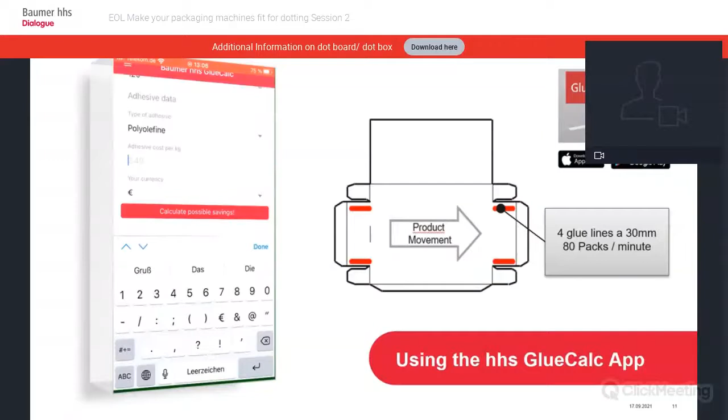When you press the Calculate Saving button, you will see your production potentials in the graphic. With a 5 mm dotting, you get more than 20,000 euros saving each year, and on top, an annual carbon footprint reduction of about 80,000 kilograms.

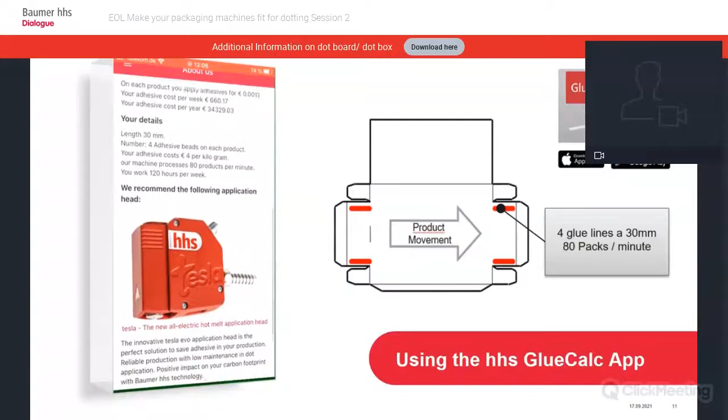The result and the recommended product you can send to your mail address or share it with other people.

And like quite often in life, sometimes less is more. And this is also the truth in gluing. Instead of squeezing glue out of the box, a dot pattern can fix the cardboard with a similar or even higher bonding strength.

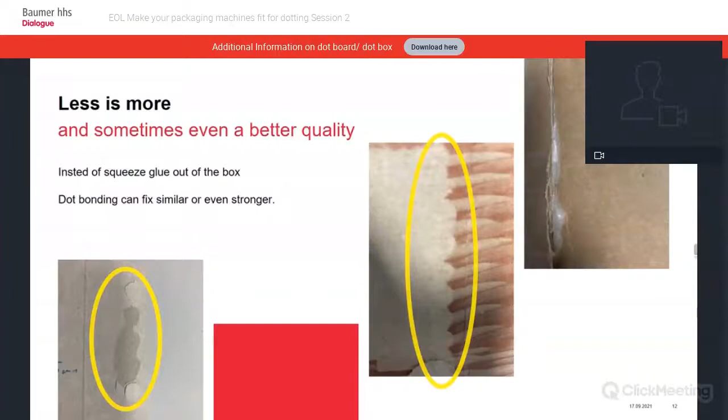Okay, our calculation is done now, but this is only theory. Let's have in the next step a look in our solution center. There we can see some of the products that we need to fulfill these calculated savings.

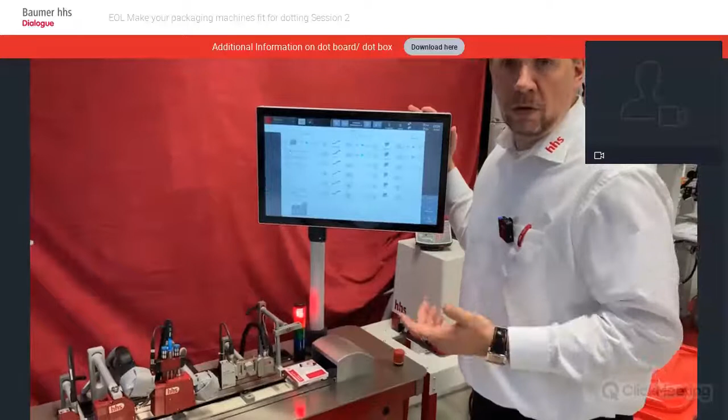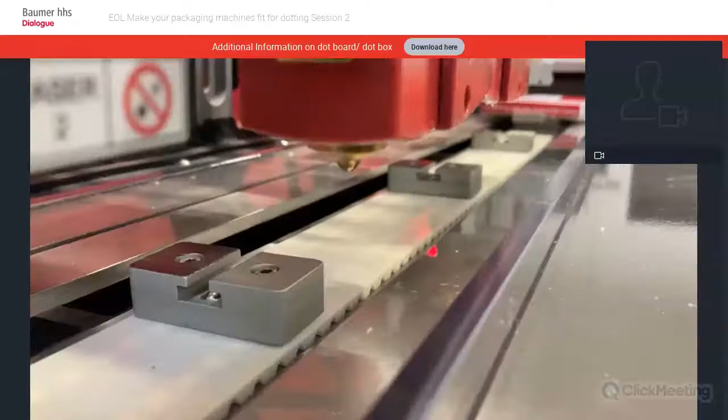We are proud that we have developed our Dotbox Kit, which makes a change from line to dot very easy. It just consists of our dot box and the Tesla applicator. On our simulator we have an HMI that is driving our melter to set up the temperatures on gun and hoses, and also controls classical applicators like pneumatic or our Tesla Evo gun, which can connect to a classic PLC. The PLC is driving a classical line application.

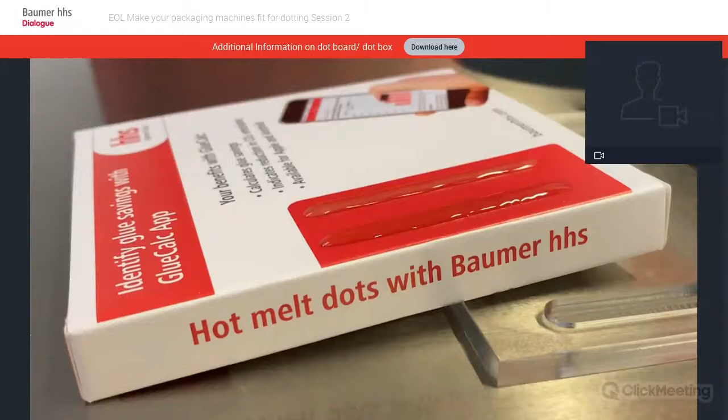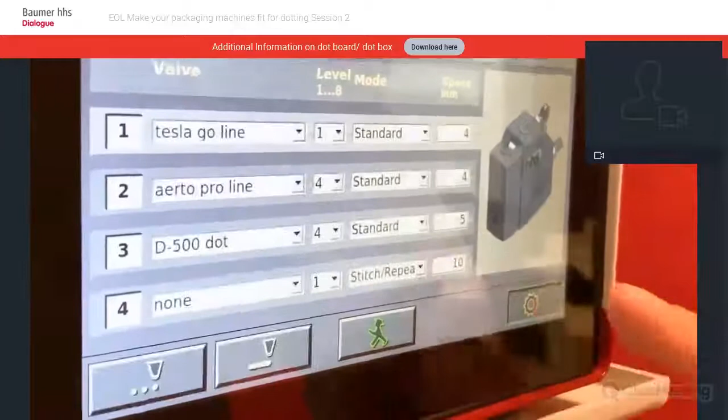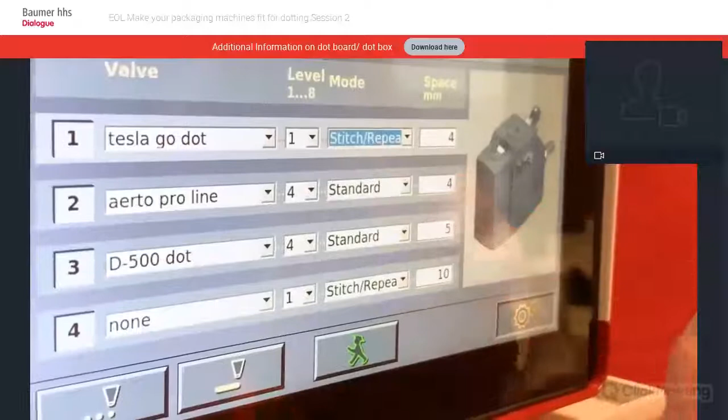To switch to a dot mode or to dotting, it's quite easy with our dot box. We just press this setup button, adjust the Tesla Go into a dot mode, choose the stitch and repeat mode, and set up the dot distance we want to reach in our application. The same, of course, we can do for pneumatic applicators.

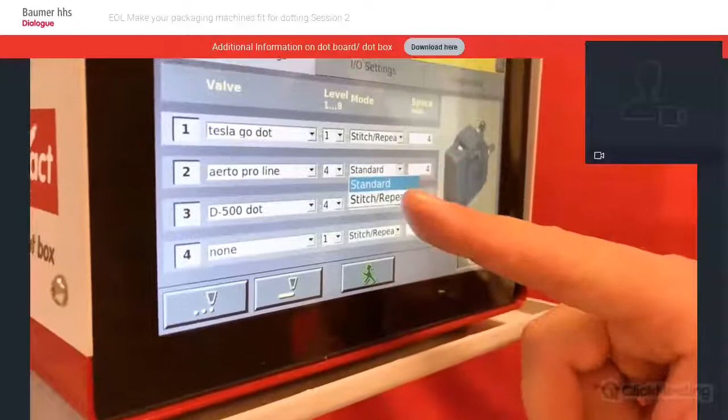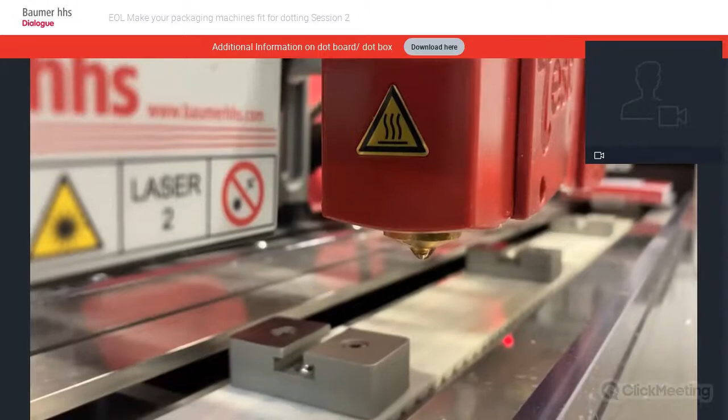Now our dot box between the HMI and the applicator is changing from line to dots. So in our diagnostic tool, we show directly how much glue you are saving depending on the dot distance and the dot size.

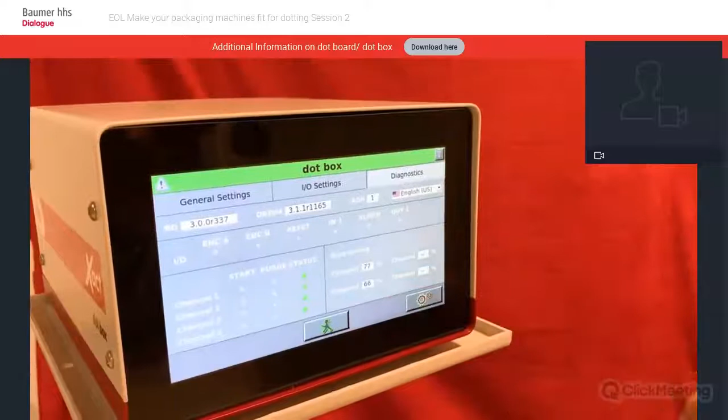As you have seen, with the Dotbox it's possible to change the line into a dot mode with electronic or pneumatic applicators. We adapt the Tesla in the Dotbox Kit, so that is something which really makes sense to run your production with an electronic gun and with our Dotbox.

For us, the Dotbox kit is something like a starting kit that gives you the chance to check your calculation in practice. The kit includes 2 Tesla valves that can be connected to Nordson or Nordson compatible gluing systems.

There is 1 dot box that can drive a maximum of 4 glue valves and generate your dotting pattern. You also find in the kit different screw-on nozzles with different diameters and 2 standard packaging brackets. In case the standard mounted 180 hose connection doesn't fit, there are also 90-degree and 45-degree hose connections included.

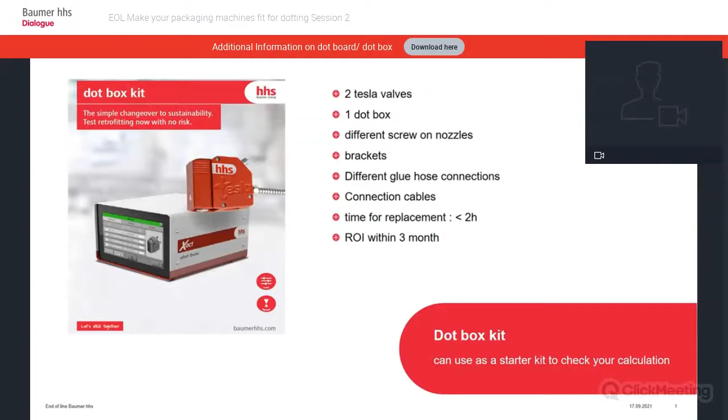Of course, you find also the right connection cables to solve a replacement in less than about 2 hours. Because of the low price for the starting kit, we expect that you can reach the return on investment in less than 3 months.

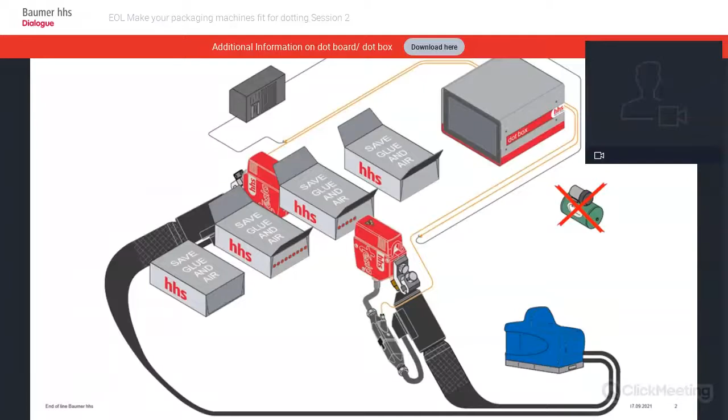Your current situation is maybe like this. After installing the kit, it should look like this. And that has the wonderful green effect that you don't need the compressed air anymore.

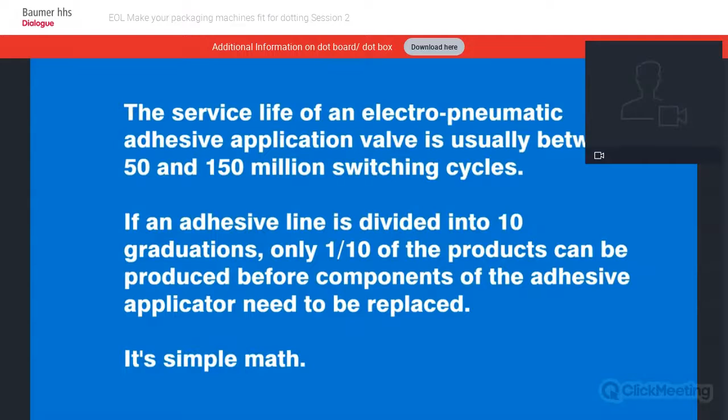It's simple math. Depending on what type of adhesive dispensing applicators you are using, your savings made through stitching and dotting may be at the expense of higher spare parts costs and downtime associated with changing them. Why don't businesses realize they are paying more and saving less than what they could? The answer is, many companies have become accustomed to this situation and are not aware of the high cost of the spare parts used in their hot melt applications.

Electromagnetically driven adhesive applicators, such as the Baumer HHS Tesla, have a 10 to 20 times longer service life. Why do many adhesive dispensing suppliers want you to stitch or dot with your current electro-pneumatic applicators?

There are 2 obvious answers. The first answer is simple: offering you electromagnetic applicators instead of their standard electro-pneumatic would destroy their business model. One of the leading suppliers of hot melt systems publishes that it generates 54% of sales from spare parts and services. Why would the supplier jeopardize that?

The second answer is, all suppliers have electromagnetic applicators in their stable of products. However, these have often been neglected in research and development, and are no longer state-of-the-art. Most suppliers only use their electromagnetic guns when pressured, and often they only work in very limited situations.

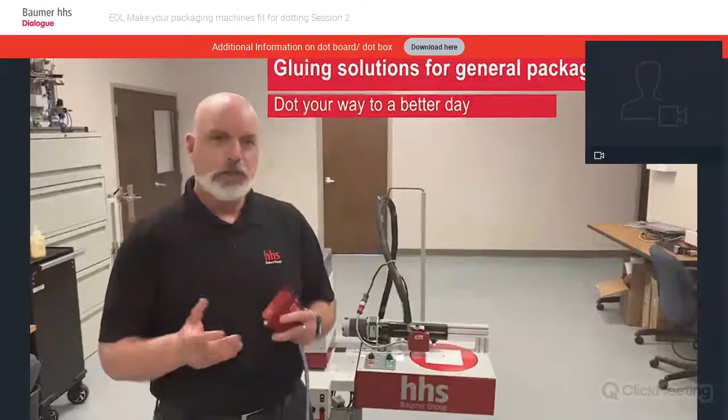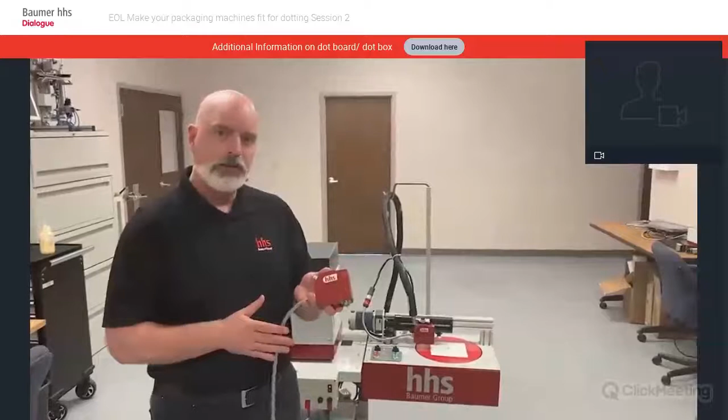Hi, I'm Rick Pallanti, and welcome to our virtual trade show for PMMI. Sorry we don't see you live in Chicago, but here you are on tape here in Dayton, Ohio. This is our lab, and we're going to talk to you today about how to dot your way to a greener day using our Tesla all-electric 24-volt actuated gun.

The Tesla is kind of revolutionary to the packaging industry. If you want to think about it, most of your guns you're used to are pneumatic, and a pneumatic gun requires air, and therefore it has seals. You'll see that guns a lot of times will have adhesive leaking out of their weep holes due to seal failures.

Most pneumatic guns will have maybe 5 million to 50 million cycles before they need some type of spare part or repair. The Tesla is unique in the aspect that it's all electric, so there are no dynamic seals to fail. So on the Tesla, you're looking at a much longer service life than a pneumatic valve.

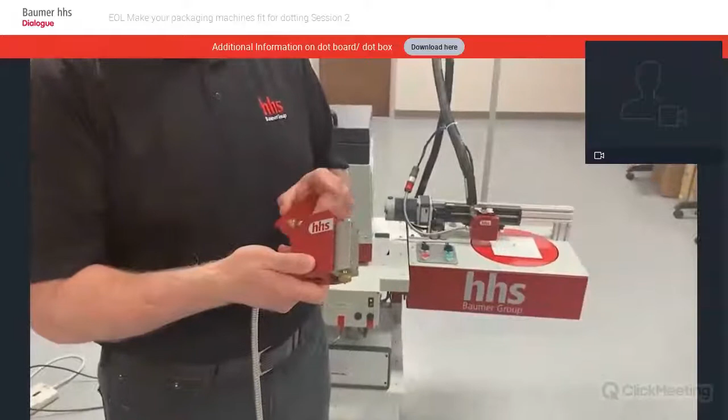And what's nice about it is it runs off the same 24-volt signal that your pneumatic applicator runs off of. So there's really no change for what you have to do in order to go from pneumatic to electric. This also means that you're not using compressed air any longer.

Compressed air is a very expensive resource, and it's something that you have to bring to the machine, you have to bring to the gun, and a pneumatic gun will operate differently depending on what type of pneumatic pressure is coming to it. If the pneumatic pressure drops, then the gun doesn't cycle, or it wants to string, or it wants to drool. You'll never have that problem with a Tesla gun. You'll always operate the same way each and every time.

The Tesla is also very, very robust. I wish you could feel this, but it weighs about twice that of a pneumatic applicator. It's a tank. It will last a very long time. So you're looking at about 1 billion cycles for this gun versus 50 million for a pneumatic applicator.

Now, we talked about how to dot your way to a greener day. So what does that mean?

What we're going to do is, on a packaging application, take what you normally would do as a bead, which would be a solid line of adhesive, and dot it instead. We're going to take that 24-volt signal and run it through a dot box, and we're going to break it into these dots.

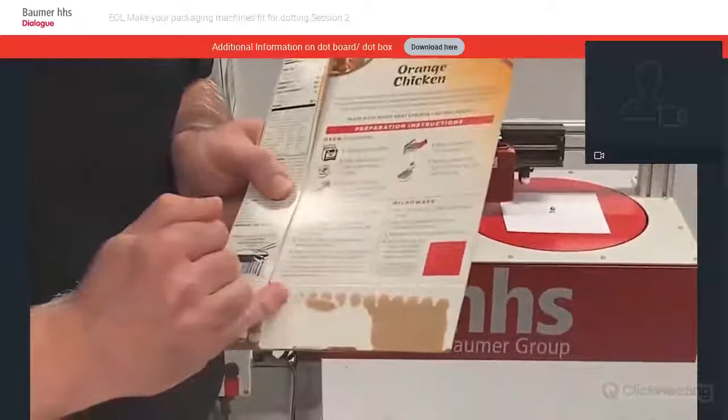When you have a very long bead, there's a lot of residual heat that sits in the product, which can lead to pop opens a lot of times. So it's kind of like you have to think about it as a jelly sandwich. If you've got a carton and both sides are glued together and it pops open with glue on both sides, then you've got a cohesive failure.

A lot of times that's because there's too much adhesive on the carton, and that's why you get the pop open. Going to dotting really eliminates that, because now you have individual applications of glue with the same amount of heat through that. So I'm using 50% glue, and you can still see how I'm getting great fiber tear. If you try to stitch a bead, you're still basically just having larger beads with a small break in between, so you're really not gaining that much for your application. But in this case, with dotting, we're reducing glue by 50% and still getting a good tear pattern.

Now, you may not know about Baumer HHS, but we've been in the business for a long time. We're really known for making the folding carton, and the application we do is for very high speed cold adhesive gluing. Cartons like this will run anywhere between 1,000 and 1,500 feet a minute. That's incredibly fast, much faster than what you normally run in general packaging.

So what this does is it shows that we know how to run an electric gun, we know how to make an electric gun last long, and we know how to dispense the adhesive. We've taken that knowledge and transferred it to hot melt technology. And that's what we've done with Tesla.

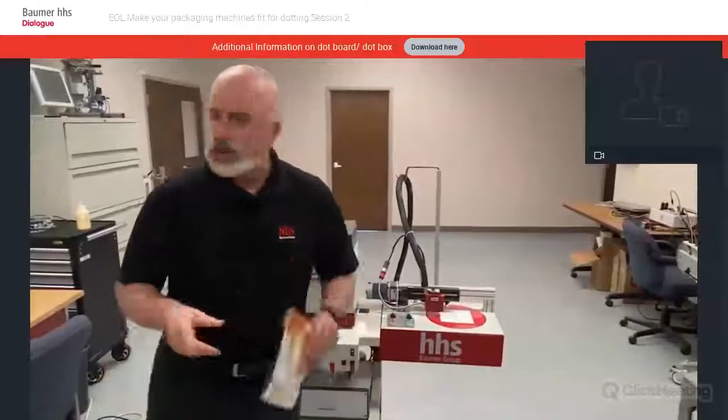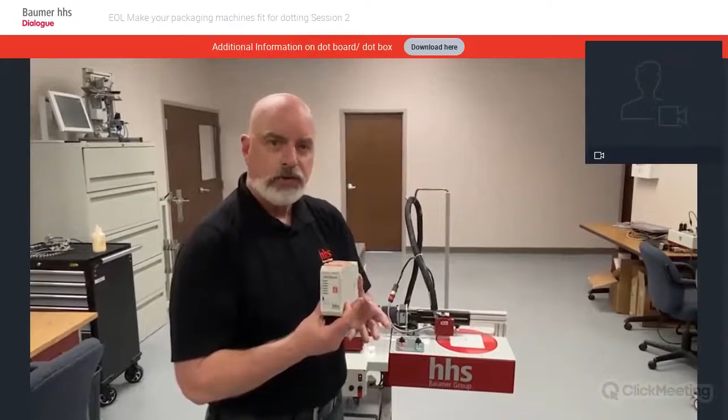In order to get the Tesla to work the way you want it to, we've developed a dot board. What the dot board does is it takes that 24-volt signal, and we're able to program it. This can go either into the OEM box and run from the PLC, or we have a dot box that we can sell that goes in between the applications—you can do it DIN rail mounted inside, or as a separate box in the system itself. By taking this dot board, we're able to take that signal and break it into 50%, 60%, 30%, whatever works for your application.

And we can add the Tesla and the dot box to your existing application. You don't even have to change your hoses or your melter. We can just add the Tesla gun, add the dot board, and you can start dotting.

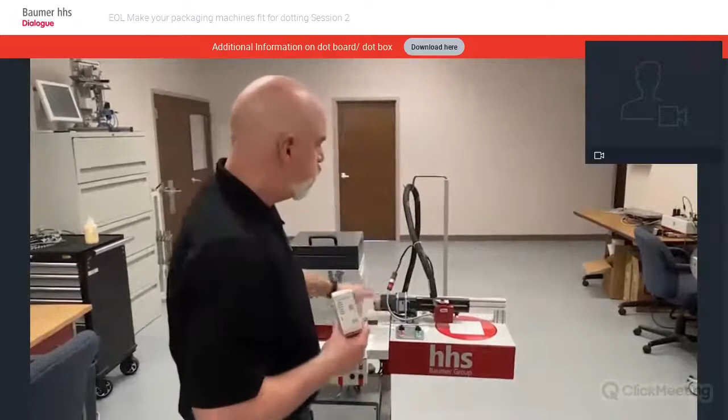Now in this application, we're showing all HHS. So what we have is our X-melt unit, which warms up in about 20 to 25 minutes. That's typically twice as fast as most melters in the market right now. So you're using a lot less heat.

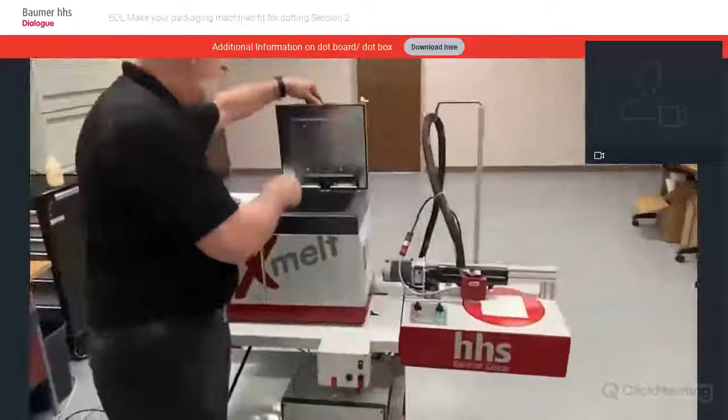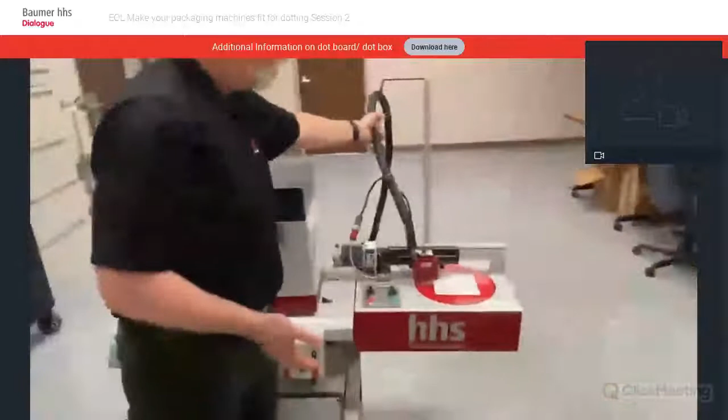And the way this is set up, if you want to come in and take a quick look, we've got it set up so it's got the fins—the top portion is unheated and only the bottom portion is heated. We run that through this hose, and this hose is only 30 millimeters in diameter. Most hoses are 45 millimeters in diameter.

It's like trying to wrestle an anaconda through your OEM machine. So by going to the smaller diameter hoses, you're not losing anything, because the hose core is the same as it would be on the larger 45 millimeter hose—it's an 8 millimeter hose core, which gives you the same flow. So you're able to get the flow and have a smaller overall profile, which is very beneficial for maintenance, or if you're trying to run longer hoses through the machines.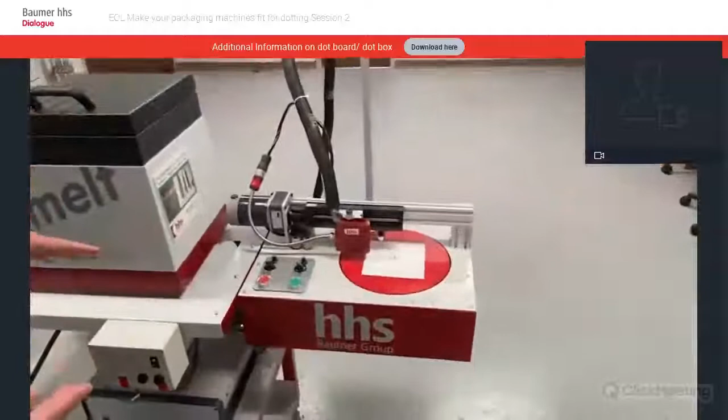And then it comes to our Tesla gun. This whole system right now is set at 350 degrees. The Tesla with the cover on it—what this cover does is it protects you for incidental contact, when you're trying to change a nozzle or take this off, it's going to protect you from coming in contact with it. And that's a really beneficial safety aspect for the machine.

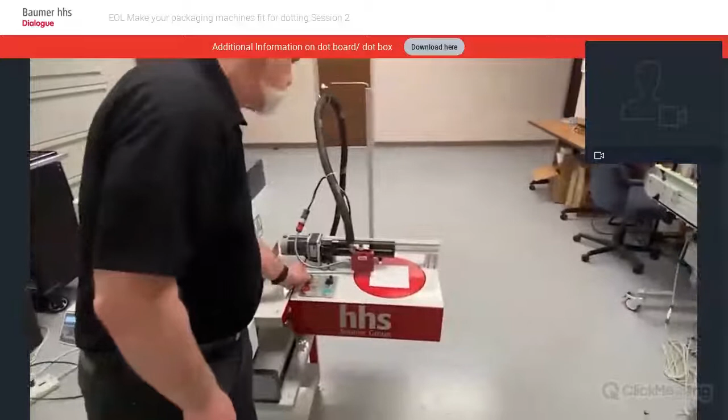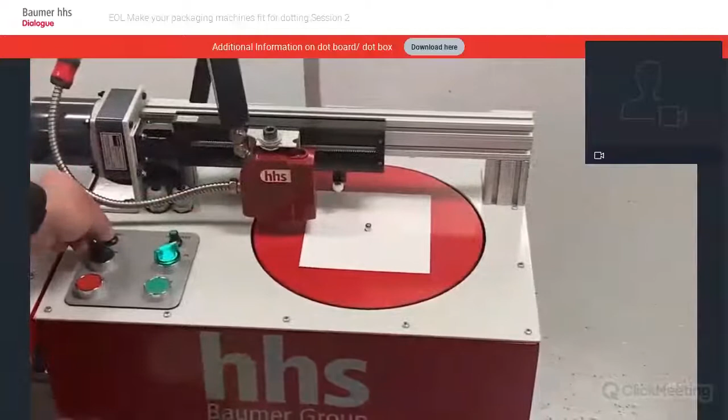Now what I'm going to do here is show you something with the Tesla gun. We're going to do a 50% glue savings. I'm going to run the gun at a very slow speed, and you can see here.

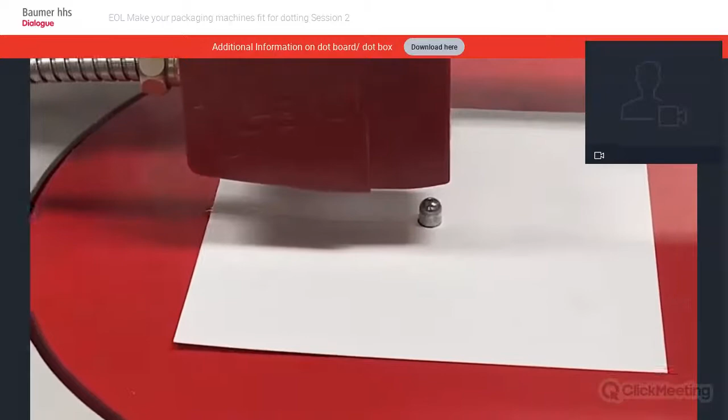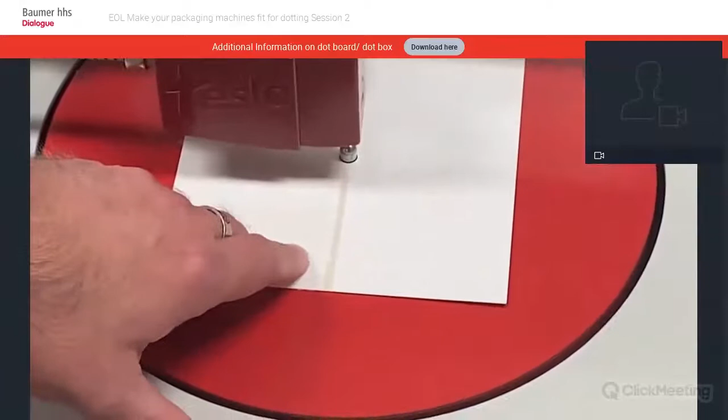The Tesla is very quiet—almost 30 decibels quieter than a pneumatic valve. And from what you can see here, this is 50% glue savings at that speed. You can see it's almost still a solid line, but there's 50% less glue at that same speed as what you would have in your application if you were doing that full bead.

Now what I'm going to do is run this again, and we're going to run it at a faster speed. Here we go. And you can see here, now we've got the individual dots. You can start to see the individual dots as the speed increases.

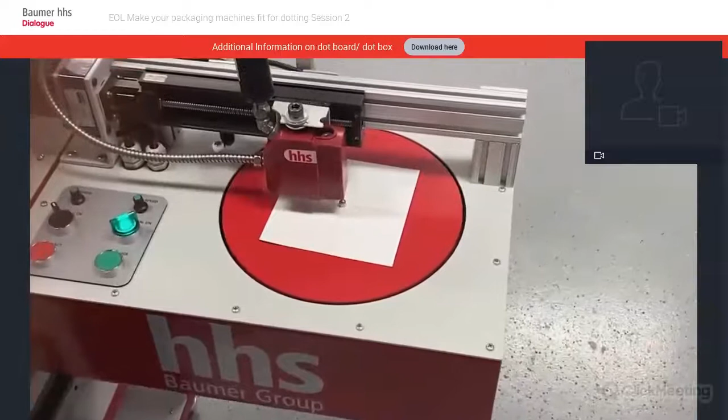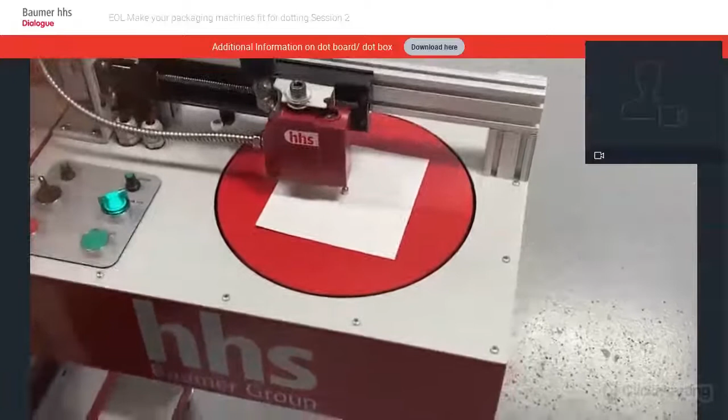In some cases, you can think of dotting as a poor man's ramp-up. So as the speed decreases on your line, let's say you have a collapse or something stops, you're not going to have that squeeze out or dripping, because the dotting is able to maintain that same amount of volume for each dot that comes out.

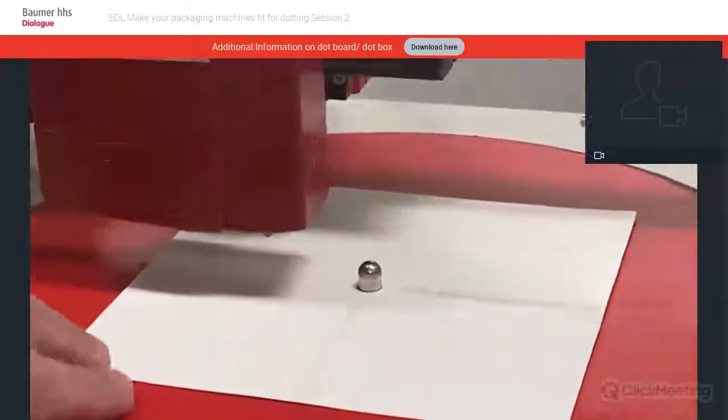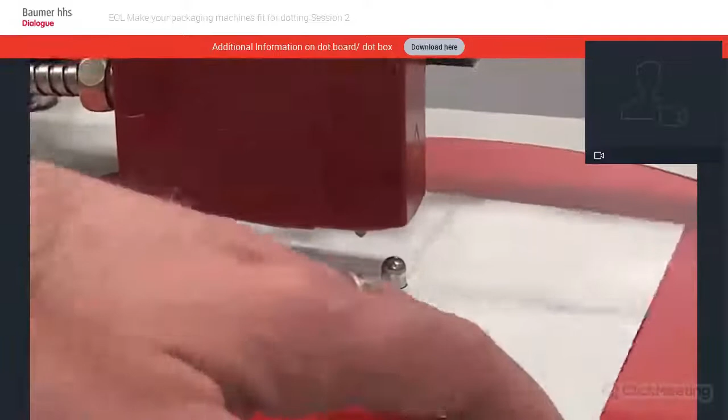So we're going to go ahead and take this back one more time, and we're going to increase the speed. You can see the dots spread out, but the dots have remained the same size as we go through the whole aspect of this demonstration.

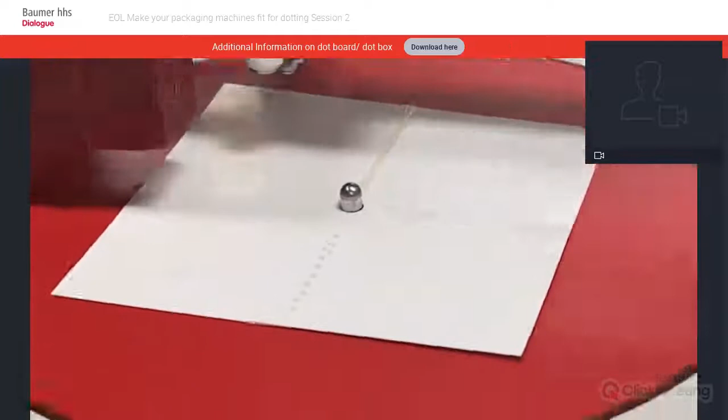So let's take it back for the final one, move it forward a little bit, there we go. And then we're going to do the final one at high speed. So you can see that the dots are the same no matter what the speed is on this. You're able to have the same amount of volume every single time, no matter what your speed is.

So this is a really great way to control your volume, to control the amount of adhesive that you use, and be able to still get a really good bond on your application.

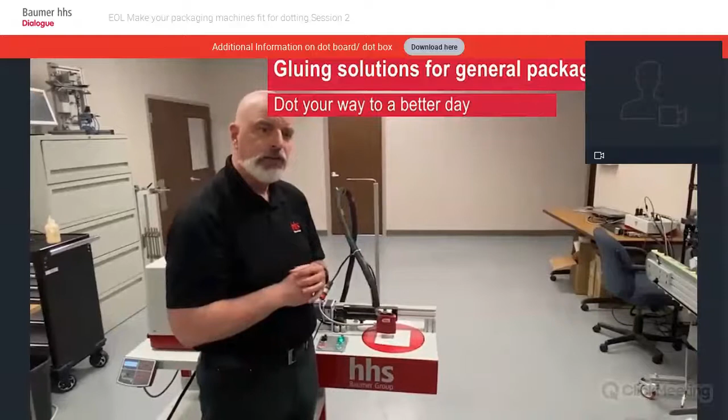Thanks to Rick in the United States, and coming back to what he's saying about the gaskets—Tesla is running without the dynamic gasket, which you can see in the animation. This is the reason why we can reach 1 billion cycles and why it makes sense to go for dotting. Let's see in the next video what you can do with this glue valve.

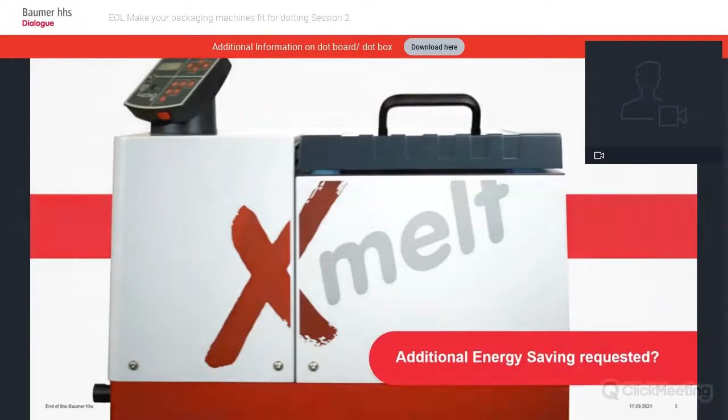With our Xmelt unit, you can even improve your energy balance by 56%, depending on what kind of gluing unit you are using right now. So if you are interested in that as well, don't hesitate to contact your local Baumer HHS gluing friend.

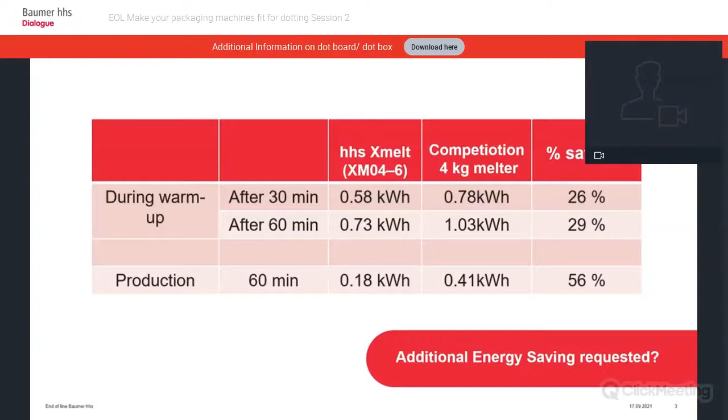Okay, our third step is done. We have understood why the HHS equipment can be useful for the packaging industry. Before we start our dialogue, let's have a look at our fourth step, the experience in the market.

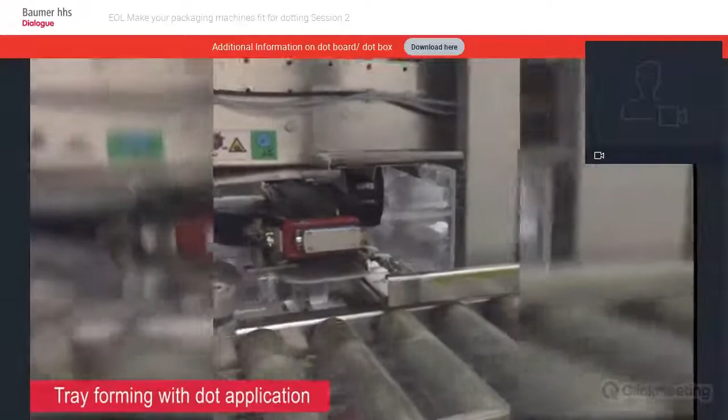Hi, this is Victor Sheldon from Mountain View Packaging in Boise, Idaho. Our experience with the HHS Tesla guns and dotting program has been phenomenal. Our first year, we saved right around $20,000 in glue savings by just switching over to the dotting system, as well as glue system downtime was cut dramatically by about 60% compared to what we were having prior to our glue systems.

I hope those videos give you a help for what you can do in your production. At least, we would like to have a short look at our gluing friend Tongli Wei in China. He is the head of Baumer HHS in Shanghai and helped a customer in the beverage industry.

In the first step, he did what we described today in our webinar on a first packaging line. In the second step, he made a rollout plan to do the improvements for the complete factory. With the shown production data, he saved about 300,000 euros each year, and on top of that, after 2 years he is still running with his first Tesla valves.

Ladies and gentlemen, we have finished our 4-step program for today. We have learned how we can make our packaging world a bit better. Packaging is always important because it saves our food and goods that we have produced with the energy of our planet. At least we are also happy that our corona vaccine was packed very well.

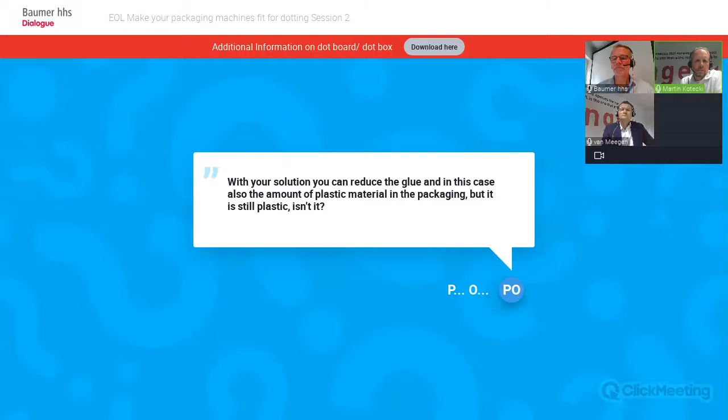Okay, thank you. We come maybe Marcel can answer the question about the maximum glue viscosity for the Tesla guns.

Yes, sure. That's a good question because it's very important due to the high speed we're running with these application heads. We're not really limited, but the best viscosity should be not more than 2000 millipascal. More ideal is even less than that to get the perfect result. You can use a lot of different glues, but you need to be within the viscosity range of this application head. There are different glues in the market which can be used with this application head, and in some cases, you need to test whether the adhesive is working or not, as you would with any application system.

Okay, thank you very much. There's a question from Peter about installation and implementation. Is there an issue to install a 6-corner glue application?

No, I don't think so. As I mentioned before, it's just based on a starting kit, so of course not. The Dotbox Kit just includes 2 guns, but you may extend that to 4 or even change over to the Dotboard. The technology is very similar, so you can upgrade with the Dotboard instead of the Dotbox, and then you can handle these kinds of applications as well. The price level is also identical in this case.

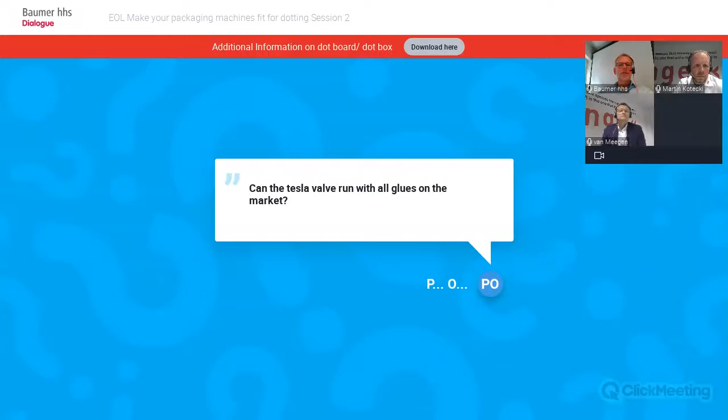Okay, thank you. So I have another question. Can a Tesla valve run with all glues available on the market?

No, it is always my wish, and we are really working on that. We have a development team working on new applicators, and our heartbeat for electronic valves since HHS has been on the market. But today's version can't handle all the glues - that's also the reason why we are also using pneumatic applicators, let's say up to a viscosity more than 2000 millipascal.

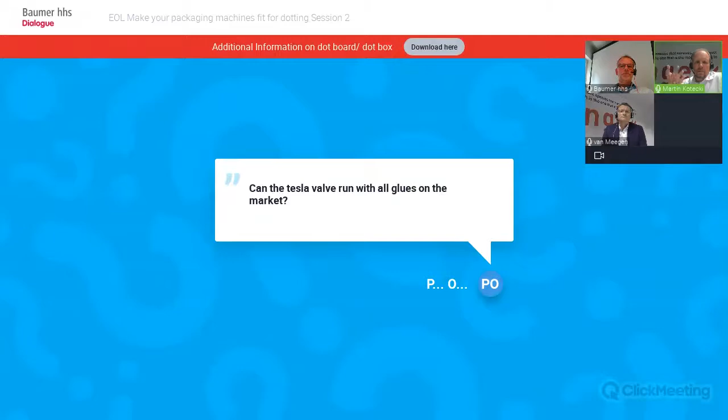I guess it could become a bit more critical, especially in the packaging market, because the distance between nozzle and product is not like in folding carton applications where you're very close to the product. In this market, we more often face a bigger distance, which is a bigger topic for the electronic valves - you need the shooting energy, and high viscosity breaks that down. It needs a longer time from point A to B to reach the carton, so I recommend a glue lower than 2000 millipascal to run a stable process in the market.

Okay, I agree to that. So there is Adam asking a question about pharmaceutical production. I think there is a misunderstanding about Tesla as a gun and Tesla as adhesive - maybe we can just clarify this.

Yeah, of course. In general it can be used in pharmaceutical production, but it has nothing to do with the glue - it's only the material we are offering. The material which is in this valve or in the melter is coming from different glue suppliers.

Okay, coming about cost. Do you have any prices, Martin? Like I mentioned, we have a price level for the starting kit. In general, you can't say it's always the same price, but the kit is roughly about 5,000 euro. But this is only the starting kit.

We've seen several applications, quite often horizontal cartoners, where you only need these two guns, and there you can reach that saving in less than 3 months. So the return on investment is really quite fast in this case. For that reason, we decided you can try it for that time period and find out if your calculations are right and you're successful with this starting kit.